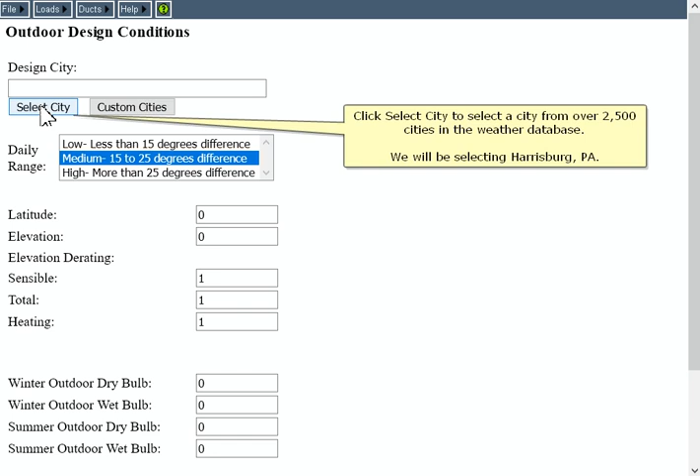Click the Select button for United States. Click Select for the state of Pennsylvania to select from all the cities available in the state. And finally, click Select for Harrisburg. Notice that the latitude, elevation, and other inputs have been filled in from the data for Harrisburg.

Next, we'll go to the default room data page. Click the Loads menu, then click Default Room Data. On the default room data page, you only need to fill in some of the dimension inputs, while others you can ignore. For example, you should enter the default room height, wall height, window width and height, and door width and height. You can ignore all the other dimension inputs on this page.

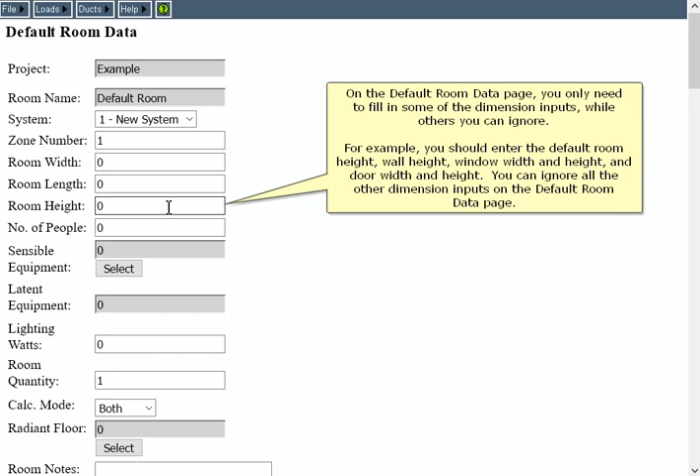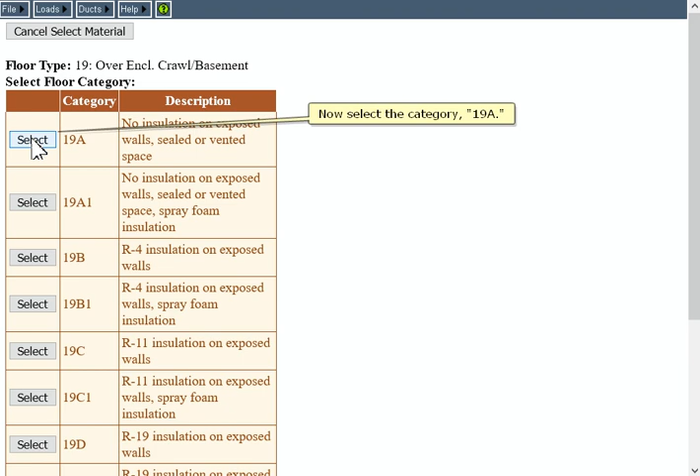Now let's select some default materials for this page. Click the Material button for the default floor. Click the Select button for floor type 19, over enclosed crawl space / basement. Now select the category 19A. Finally, select floor material 19A-19P.

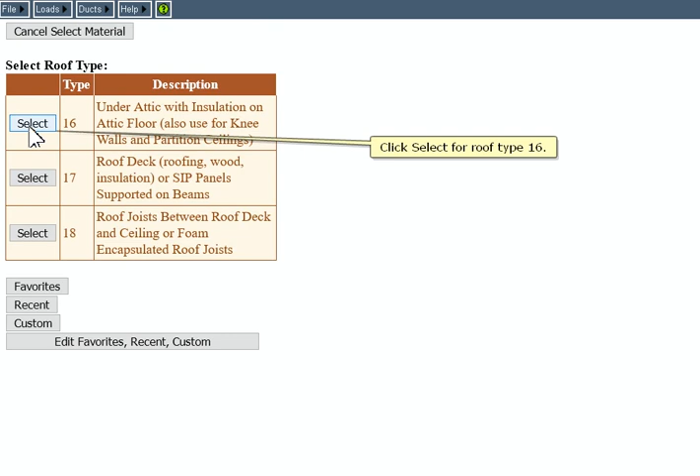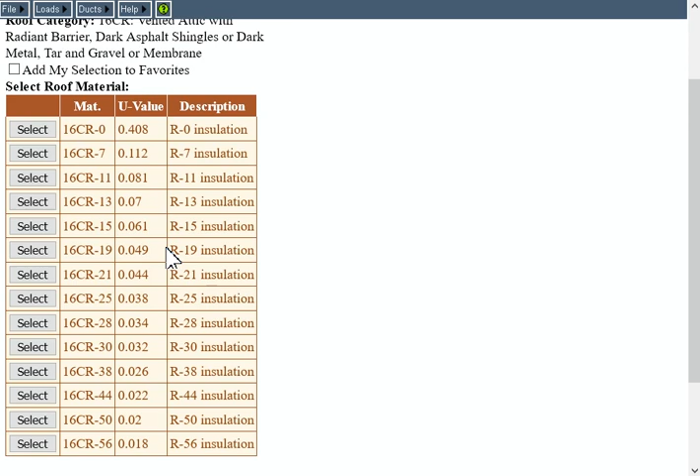We'll now continue with selecting defaults for the other kinds of materials. Click the Material button for the default roof. Click Select for roof type 16. Click Select for roof category 16CR. And finally, click the Select button for roof material 16CR-19.

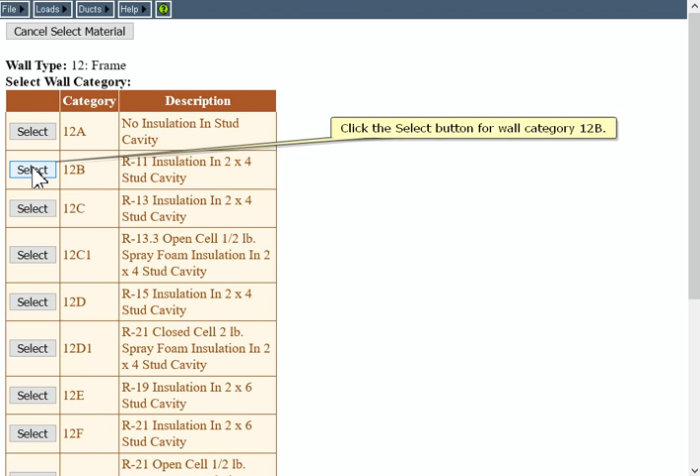Click the Material button under Walls so we can select a default wall material. Click Select for wall type 12, Frame. Click the Select button for wall category 12B. And finally, click the Select button for wall material 12B-4SW.

The wall height is one of the few dimension inputs on default room data that you should fill in. Click in the Wall Height box and enter 8 feet.

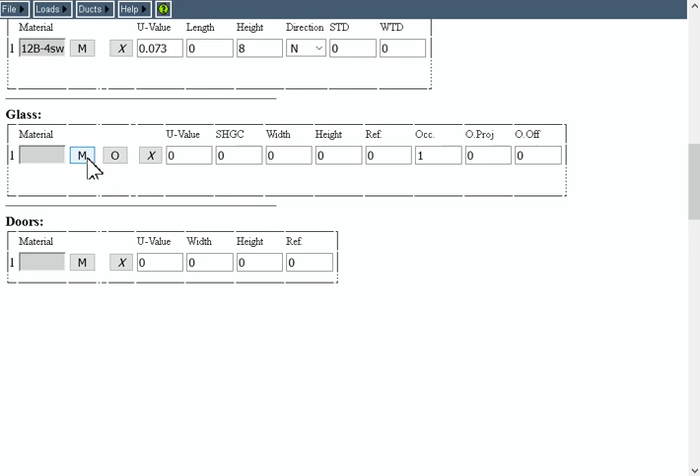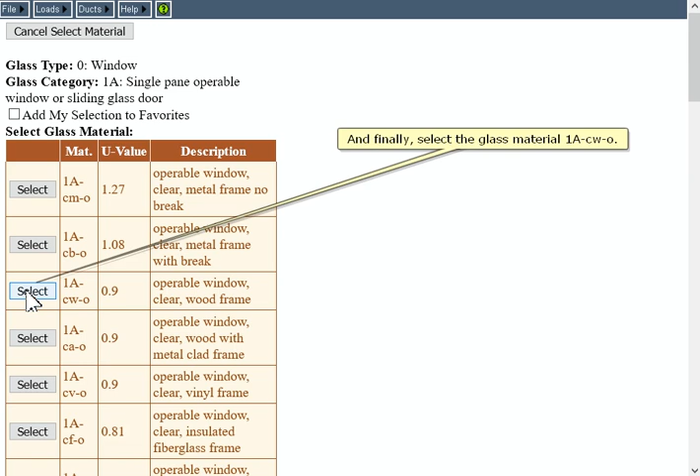Click the Material button to select a default glass material. Click the Select button for Window. Select the 1A category. And finally, select the glass material 1A-CW-O. For the default glass, enter a default width and height.

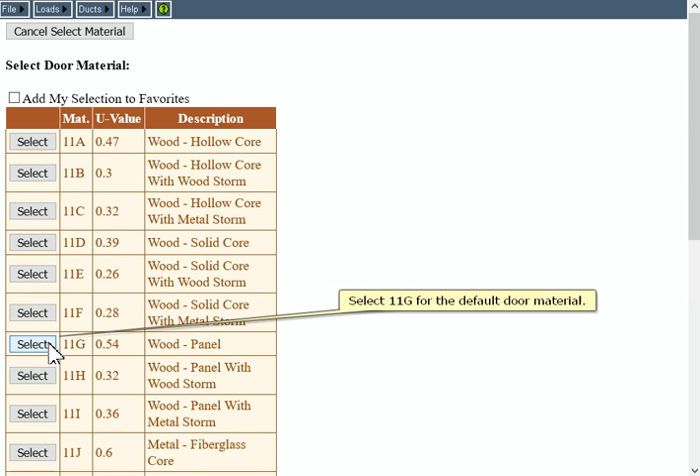Now click the Material button for doors to select a default door material. Select 11G for the default door material. Enter width and height for the default door.

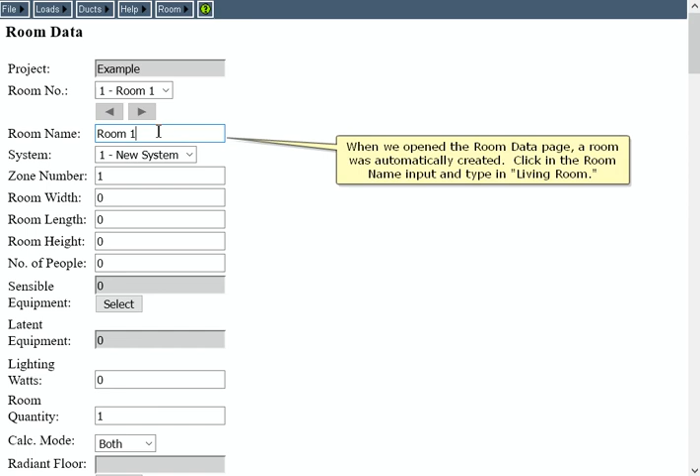Now let's enter the actual room data. Click the Loads menu, then click Room Data. When we opened the room data page, a room was automatically created. Click in the room name input and type in Living Room.

Now let's enter dimensions for the room. Now let's enter 2 people for this room, and let's enter 300 BTUH of sensible equipment gain. Click the Select button.

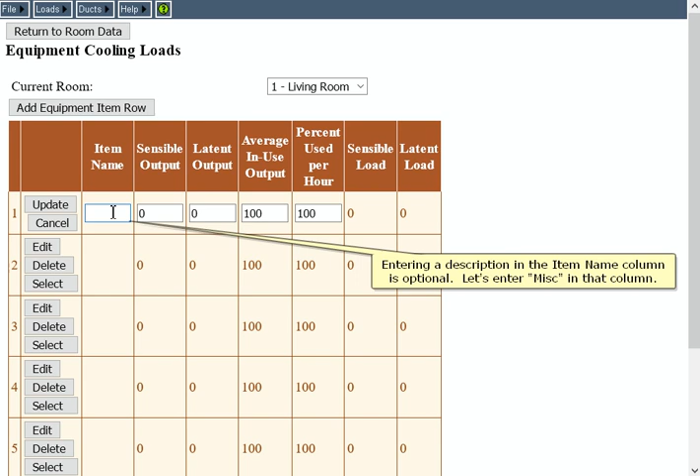There are 6 blank equipment item rows available for you to enter data. Click the Edit button for row 1. Entering a description in the item name column is optional. Let's enter MISC in that column, and now enter 300 BTUH of sensible gain for this item. To save our changes for row 1, click the Update button. That will take the row out of edit mode.

Now let's return to the room data page. The living room in this house has two different floors, a slab and a floor over an open crawl space.

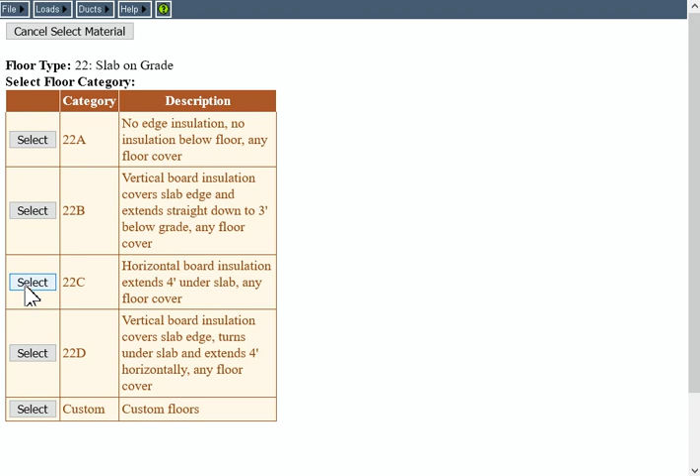Click the Material button to select the material for the slab part of the floor. Click to select 22, Slab on Grade. Select 22C for the category. And finally, select material 22C-10pl for the slab floor.

Now enter the dimensions of the floor. We can enter all dimensions, but the perimeter is the only one that matters for a slab floor.

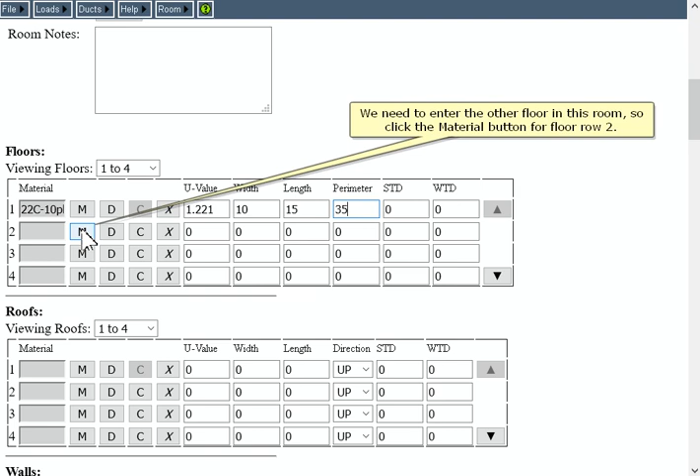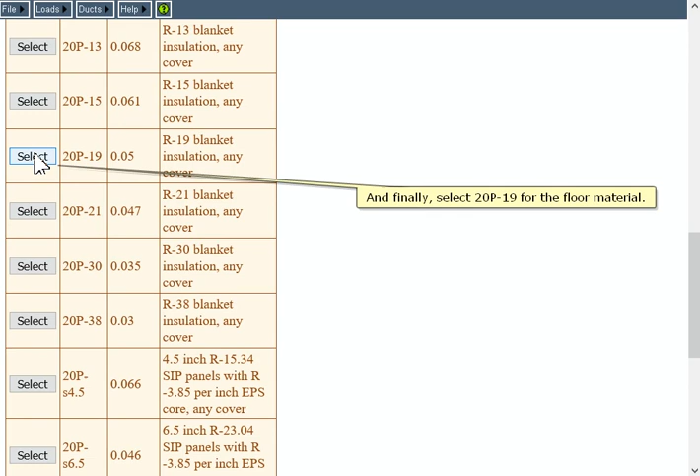We need to enter the other floor in this room, so click the Material button for floor row 2. Select Type 20, and select Category 20P. And finally, select 20P-19 for the floor material.

Enter the dimensions for floor 2. Since it's not a slab floor, the perimeter isn't necessary.

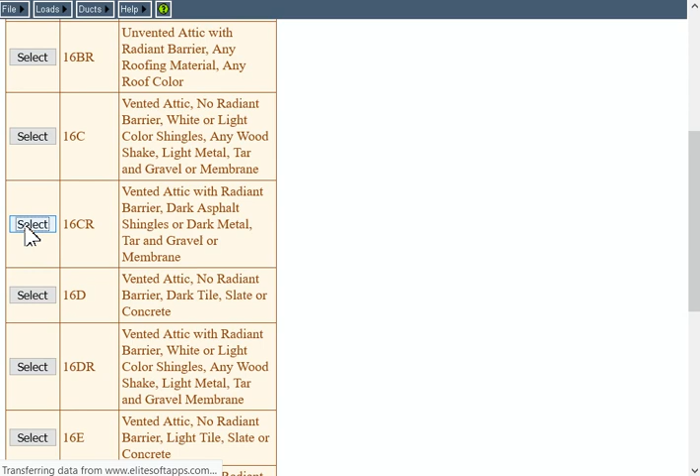Click the Material button for roof 1. Select Type 16. Select the category 16CR. And finally, select 16CR-19 for the roof material. Enter the roof dimensions.

This roof contains a skylight, so we need to be sure and enter the direction since it affects the load on the glass. Click the direction input. Click E to change the direction to east.

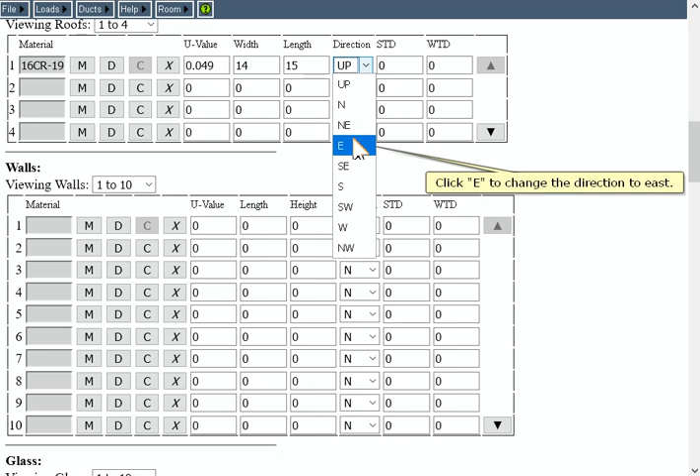We have 3 walls to enter for this room. Click the M button for the first wall.

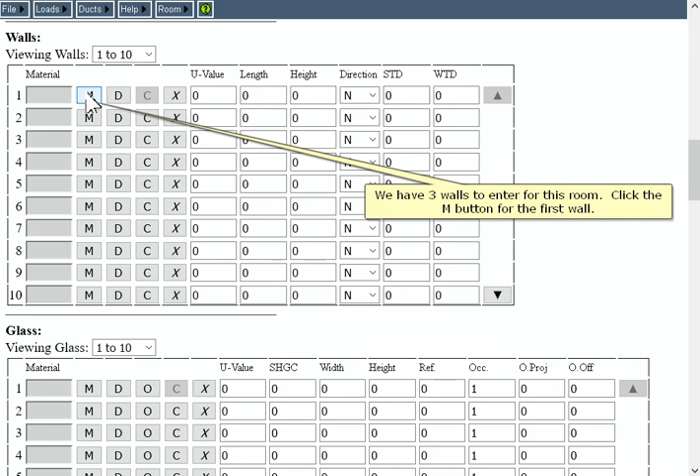Select wall type 12. Select the category 12B. And finally, select wall material 12B-4SW.

Now enter this wall's length and height. Wall 2 is the same material as wall 1, so to save time, we can click the Copy Above Wall button.

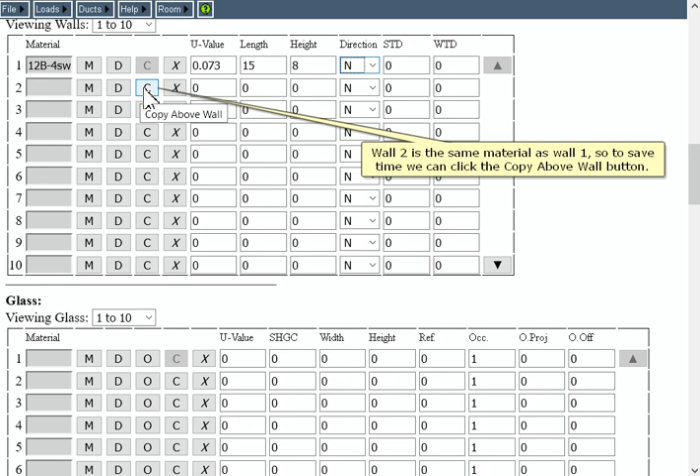Wall 2 faces east, so click the direction input. Now click E to set the direction to east.

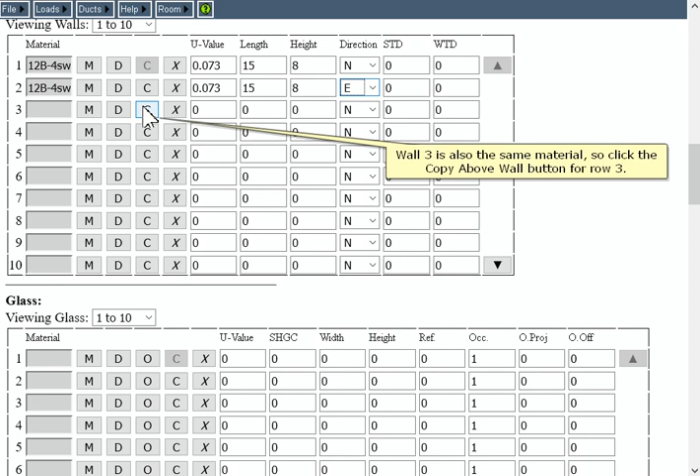Wall 3 is also the same material, so click the Copy Above Wall button for row 3. Now change the dimensions and direction.

There are 4 glass items in the living room. Click the Material button to select the first glass material. This glass is a window, so select Window.

Select 1G for the glass category. Select 1G-CM-S for the glass material.

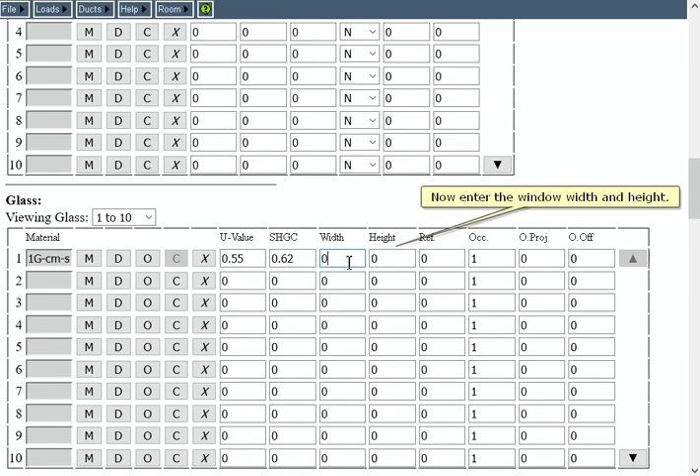Now enter the window width and height. This window is in wall number 1 in this room, so enter 1 for the reference input.

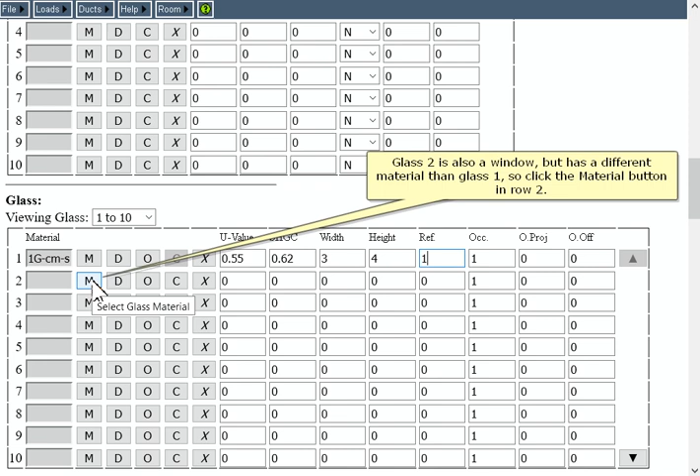Glass 2 is also a window, but has a different material than glass 1, so click the Material button in row 2. This glass is also a window.

The category is 1C. And finally, select the material 1C-CB.

Enter the window's dimensions. This window is in east-facing wall number 2 in this room, so enter 2 for the reference.

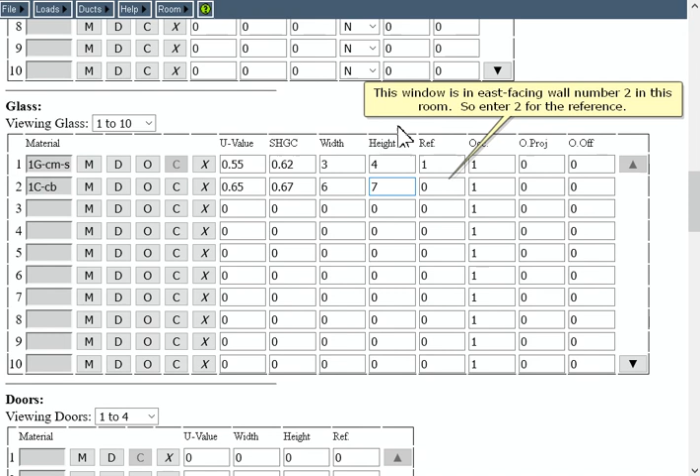Glass 3 happens to be the same as the default glass in this project, so click the Insert Default Glass button in row 3.

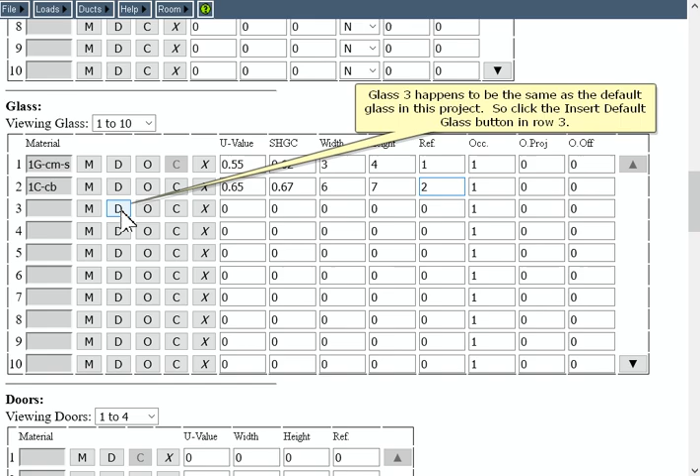The width of glass 3 is different from the default, so change the width. This window is in south-facing wall 3 in this room, so change the reference input to 3.

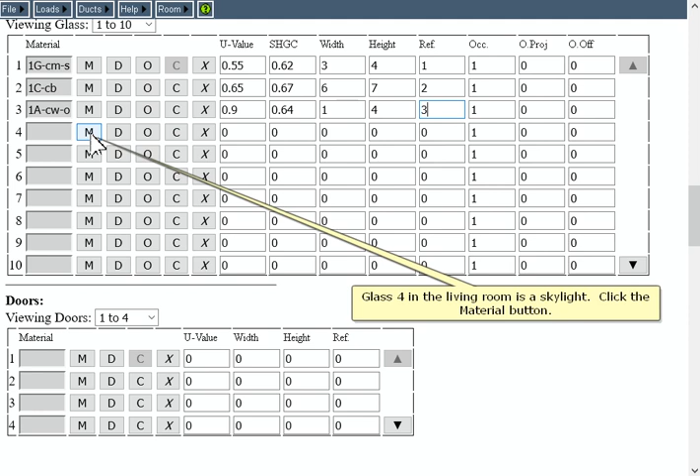Glass 4 in the living room is a skylight. Click the Material button. Select Skylight for the type.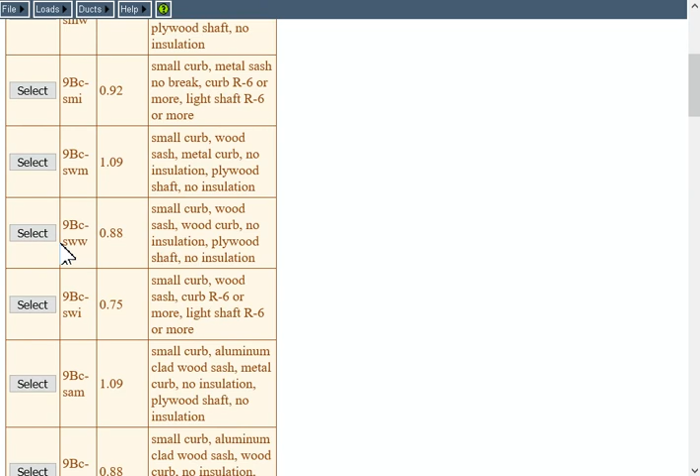The category for this skylight is 9BC. And finally, select 9BC-SWW for the skylight material.

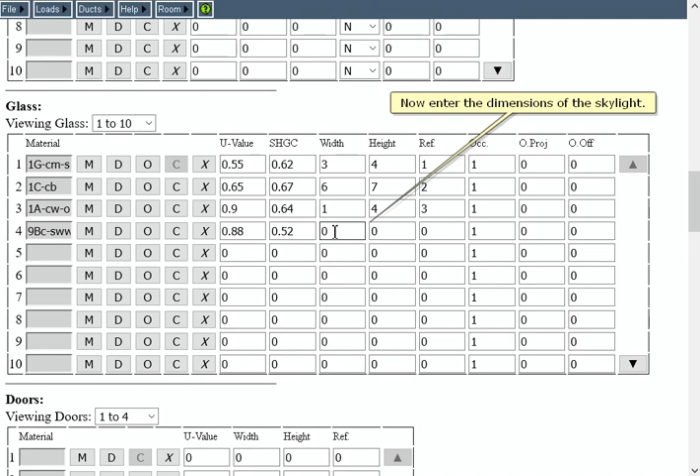Now enter the dimensions of the skylight. The skylight is in roof number 1 in this room, so enter 1 for the reference input.

The first 2 windows in this room have overhangs, so enter the overhang dimensions for windows 1 and 2.

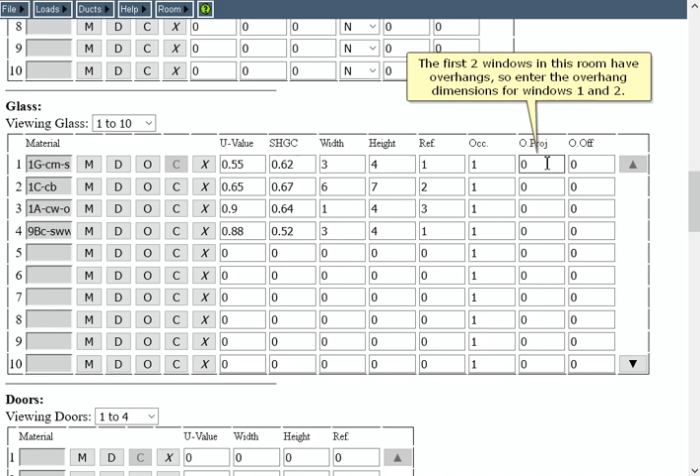This room has a door, so click the Material button for door 1. Select 11F for the door material.

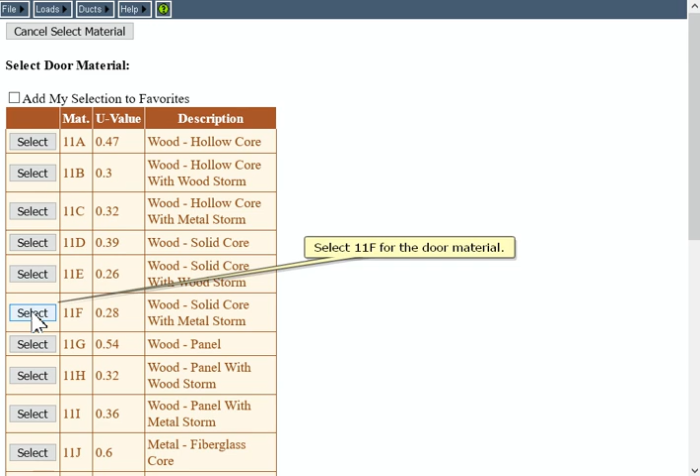The door is 3 feet wide by 7 feet high. The door is in south-facing wall 3 in this room, so enter 3 for the reference input.

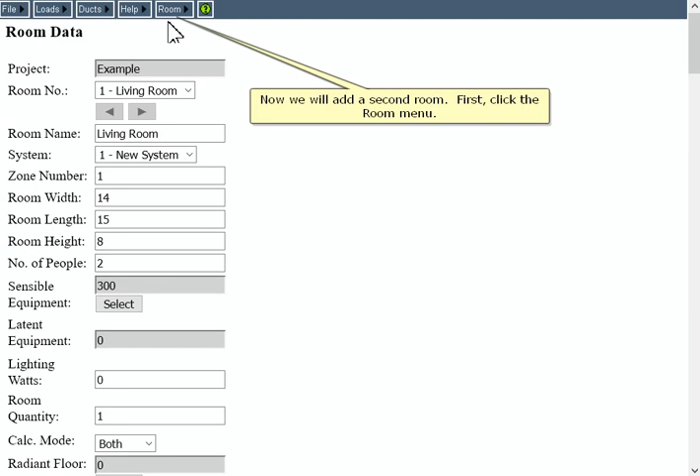Now we'll add a second room. First, click the Room menu and click Add Room. This room is the kitchen.

Enter the dimensions of the room. Enter 1 person for this room. This kitchen has 1200 BTUH of sensible equipment and 300 BTUH of latent equipment.

Click Select to enter these values. Click Edit to edit equipment row 1.

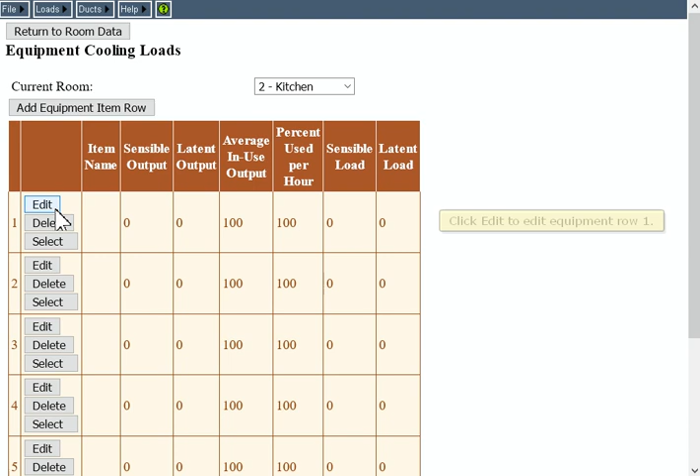Again, we'll enter MISC for the optional item name input. Now we'll enter 1200 sensible and 300 latent. To save the changes we just made, click the Update button.

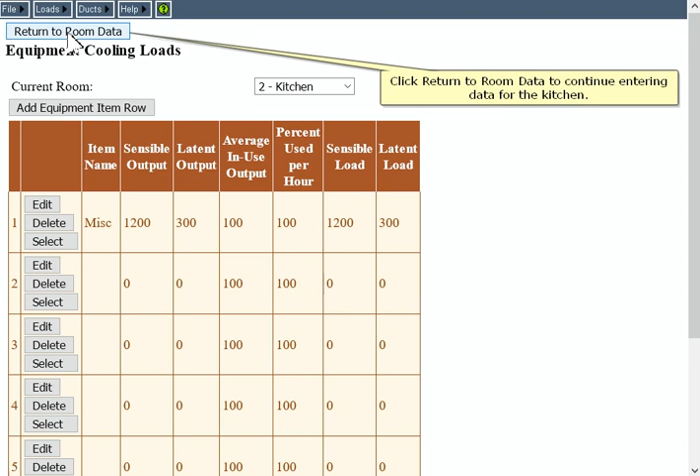Click Return to Room Data to continue entering data for the kitchen.

The kitchen has 1 floor material, so click the Material button. Select 20 for the floor type.

Select 20P for the floor category. And finally, select 20P-13 for the floor material.

Enter the floor dimensions. Remember that perimeter is not needed unless the floor is a slab.

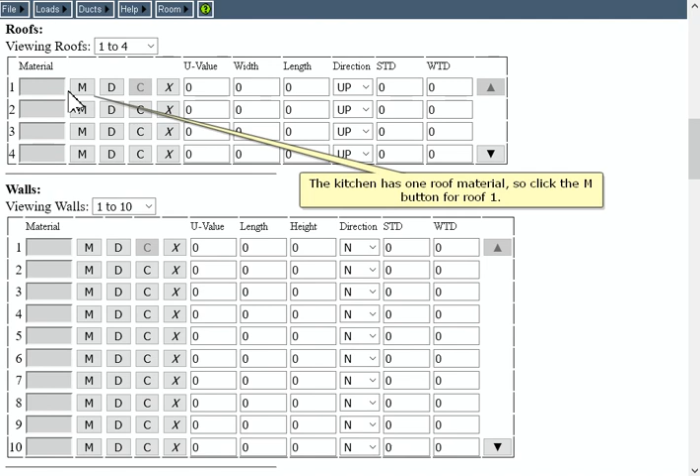The kitchen has 1 roof material, so click the M button for roof 1. Select 16 for the roof type.

Select 16CR for the roof category. And finally, select 16CR-19 for the roof material.

Now enter the roof dimensions.

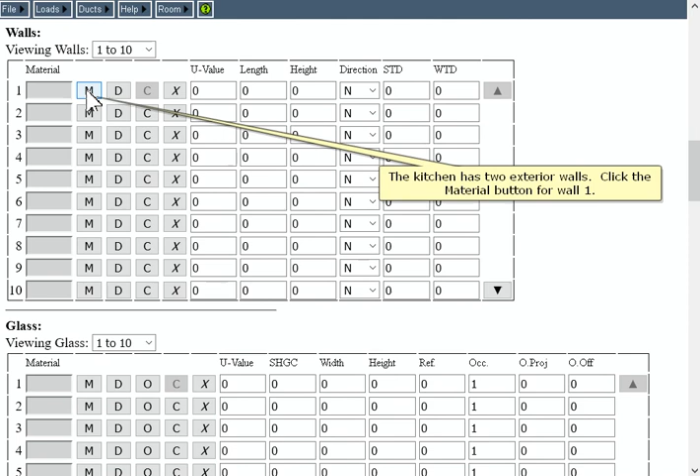The kitchen has 2 exterior walls. Click the Material button for wall 1. The wall type is 12.

The category is 12B. And finally, select 12B-OSW for the wall material.

Now enter the length and height of the wall. Wall 2 in the kitchen is of the same material as wall 1, so click the Copy Above Wall button for row 2.

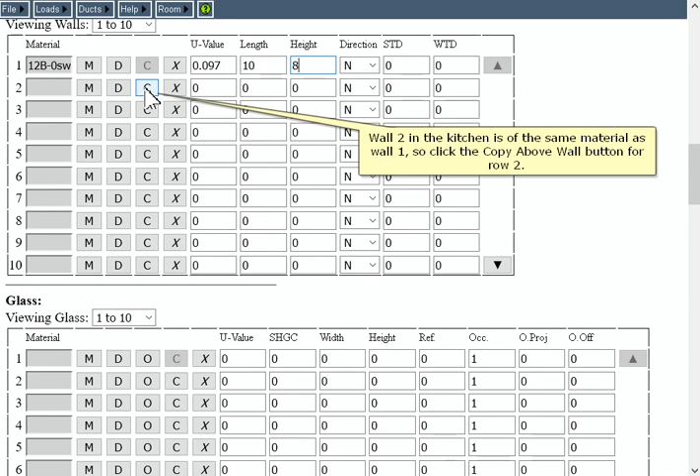The length of wall 2 is different from that of wall 1. And wall 2 faces west. Click W to make this wall face west.

The kitchen has 1 window and it's in the north-facing wall. Click the Select Glass Material button for glass 1.

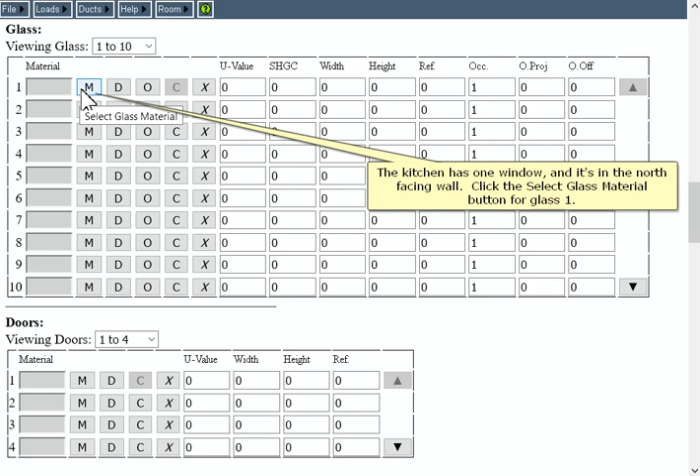Select the type as window. Select 1G for the window category.

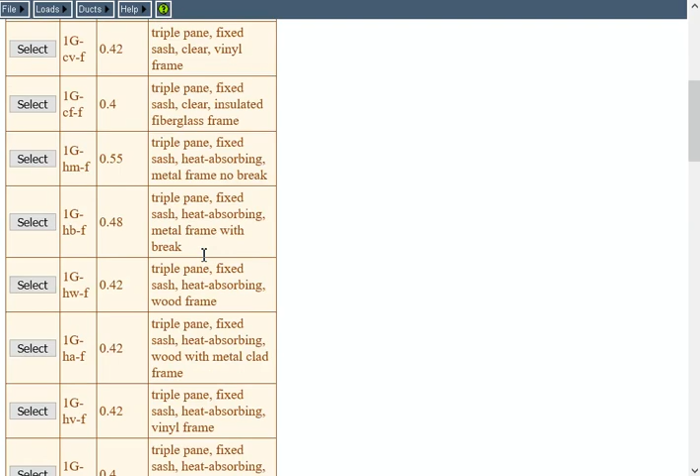Select 1G-CM-S for the window material. Enter the width and height for this window. This window is in wall 1 in this room, so enter 1 for the reference input. This window has an overhang that projects out 3 feet from the wall and is 1 foot above the window.

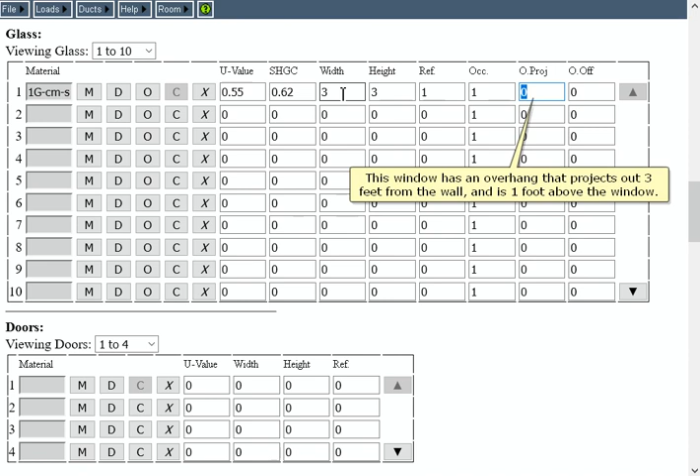Now create room 3. Click the Room menu, then click Add Room. The third room is the bedroom. Enter the dimensions of the room, and enter 2 people for this room.

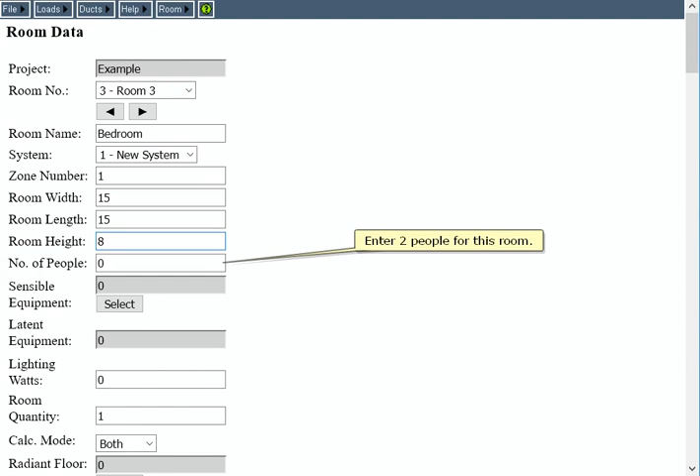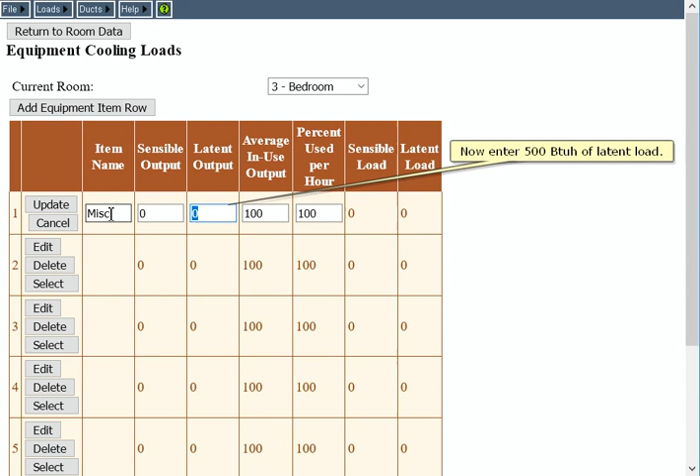Now we need to enter 500 BTUH of latent equipment for the bedroom. Click Select, then click Edit to put Equipment Row 1 into editing mode. Remember that the item name is optional. Enter MISC for the item name, then enter 500 BTUH of latent load. Click the Update button to save your changes for Row 1, then click Return to Room Data to continue entering data for the bedroom.

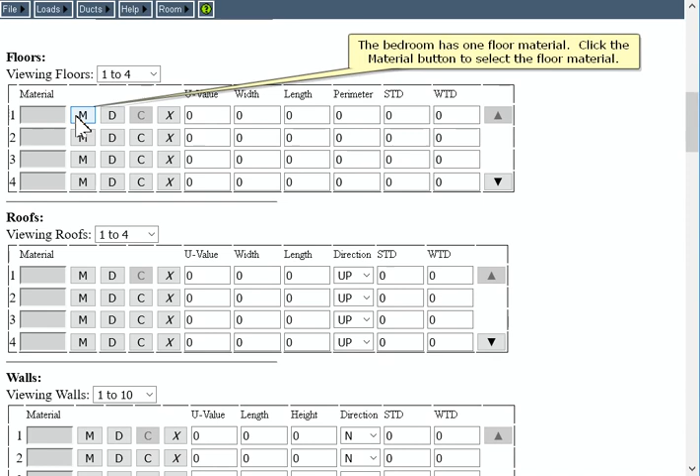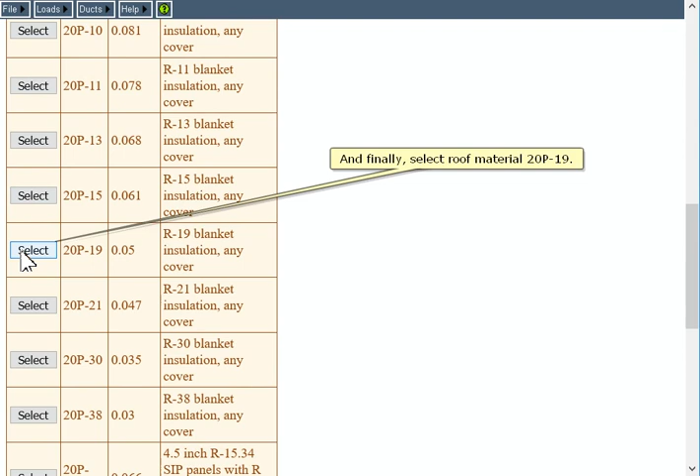The bedroom has one floor material. Click the Material button to select the floor material. Select Type 20, then select 20P for the floor category. Finally, select Roof Material 20P-19. Once again, enter the width and length of the floor.

The bedroom has two roof materials. Click the M button to select the material for Roof 1. Select Roof Type 16, select Category 16CR, and finally select Roof Material 16CR-19. Enter this roof's dimensions.

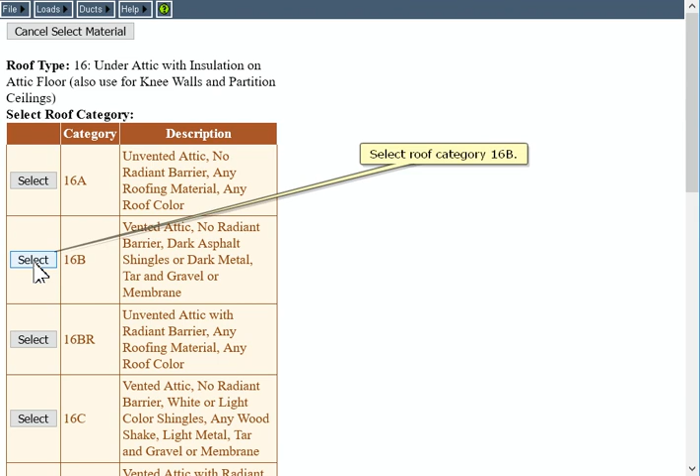Click the Material button for Roof 2. Select Roof Type 16 again, select Roof Category 16B, and finally select Roof Material 16B-21. Now enter the dimensions of Roof 2.

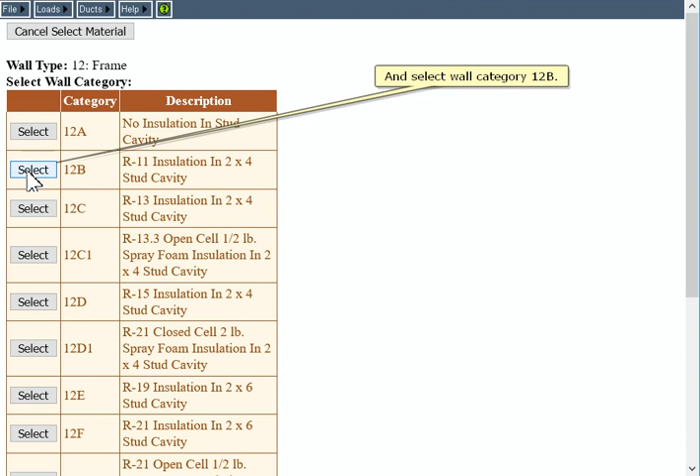The bedroom has 3 exterior walls. Click the Material button to select the material for Wall 1. Select Wall Type 12, select Wall Category 12B, and finally select Wall Material 12B-OSW. Enter the wall dimensions. Click the Direction box to set the direction the wall faces, then click W to set the direction to west.

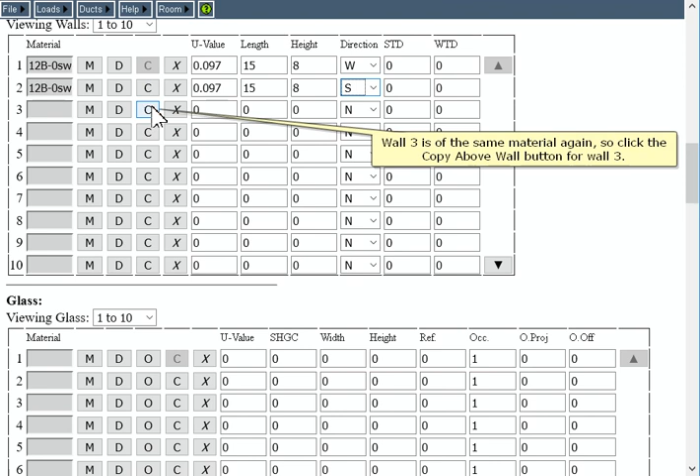Wall 2 is the same material as Wall 1, so click the Copy Above Wall button for Wall 2. Click to change the direction, and set the direction to south. Wall 3 is of the same material again, so click the Copy Above Wall button for Wall 3. Change the length of Wall 3, click to change the direction for Wall 3, and set the direction of Wall 3 to east.

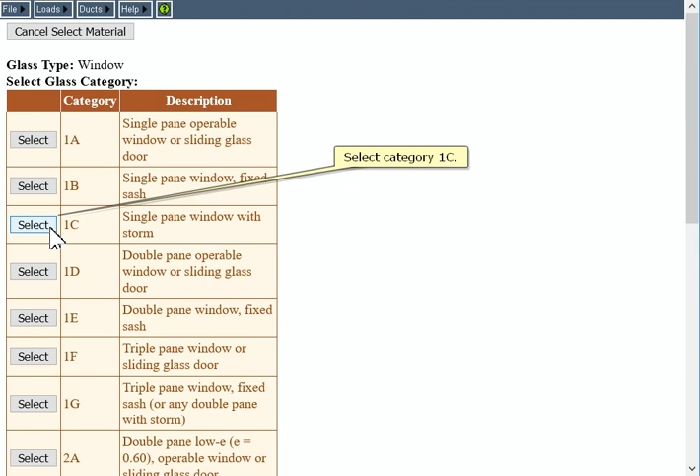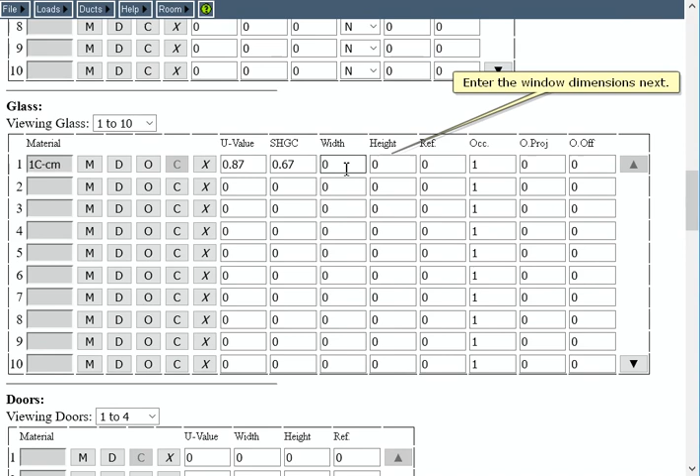The bedroom has 2 windows. Click the Select Glass Material button for Glass 1. Select Window for the glass type, select Category 1C, and finally select Glass Material 1C-CM. Enter the window dimensions next. This window is in Wall 1 in this room, so enter 1 for the reference input. Enter the overhang offset and projection.

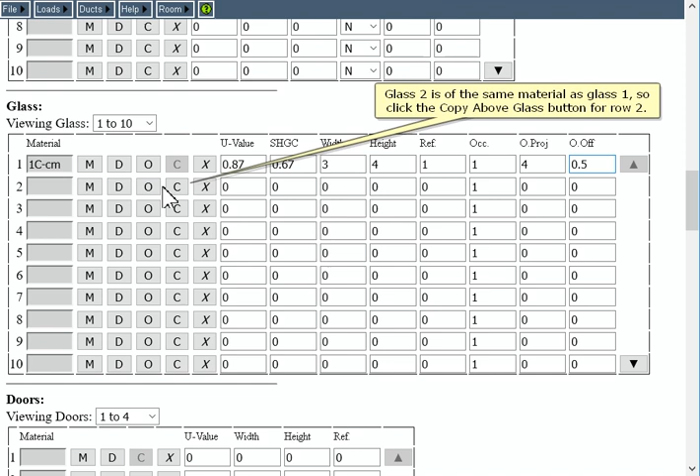Glass 2 is of the same material as Glass 1, so click the Copy Above Glass button for Row 2. This window is in south-facing Wall 2, so change the reference input to 2.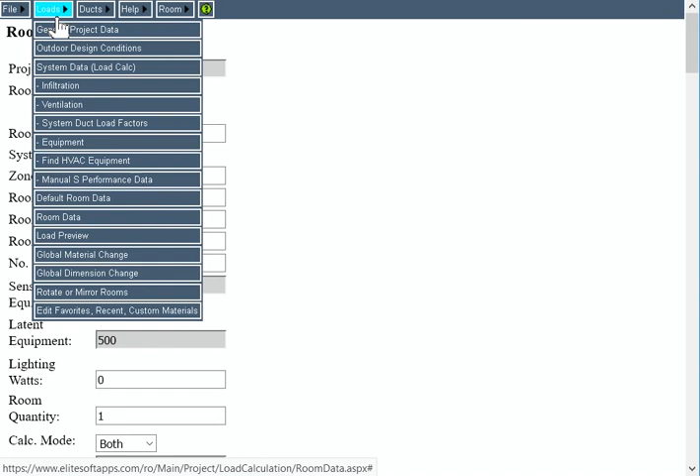Now let's enter some of the system data. Click the Loads menu, then click System Data. Enter a name for the system. The default indoor temperatures, relative humidities, and coil delta T values are all fine for this example, so leave them unchanged.

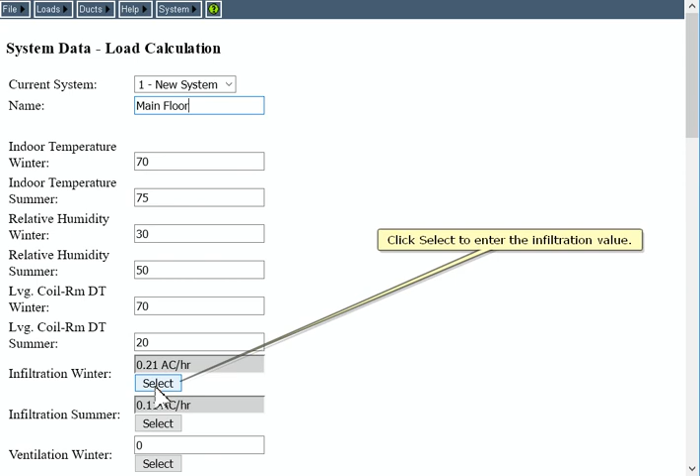Click Select to enter the infiltration value. The Manual J option is selected by default, so let's leave it that way. The only option we need to change in this example is construction tightness. Select Semi-Loose for the tightness.

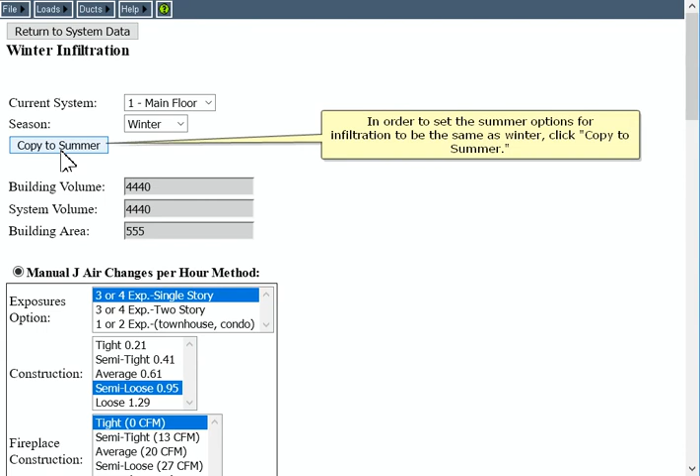In order to set the summer options for infiltration to be the same as winter, click Copy to Summer. Click the Season option to confirm that the summer options are the same. We can see that the construction tightness for summer is also set to semi-loose. Click Return to System Data.

We can set the duct load factors now, too. Click the Set button. Each system can use up to 5 duct load factor scenarios. In this example, we are only using scenario 1. Let's name it Main.

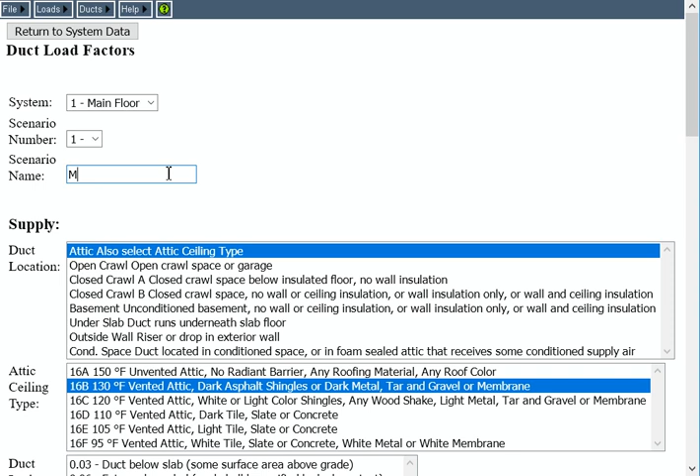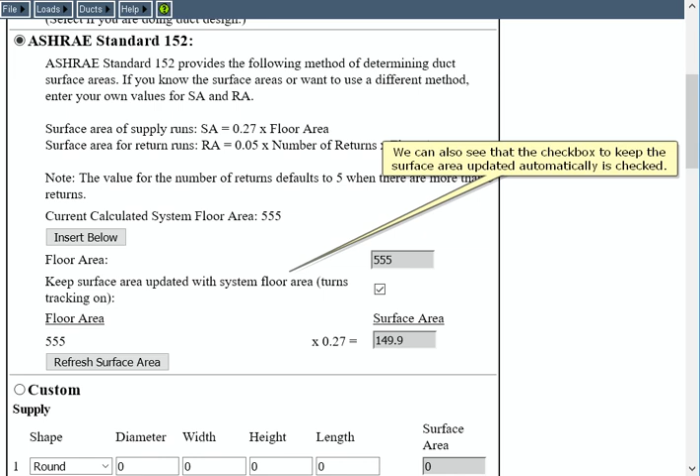To set the duct surface area for the supply side, click the Calculate button. Here we can see that the surface area is being determined by the ASHRAE Standard 152 method, the simplest. We can also see that the checkbox to keep the surface area updated automatically is checked. Click OK to return to the duct load factors page, then click to return to the system data page.

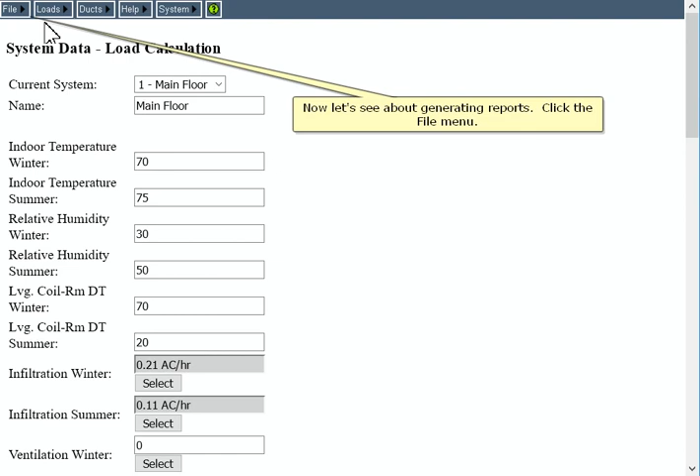Now let's see about generating reports. Click the File menu, then click Select Reports. In the Evaluation of Project box, we can see that there is a warning that glass number 4 in room number 1 has a problem.

Click the Loads menu, then click Room Data. The problem is in room 1, so click the room number box, then click Living Room.

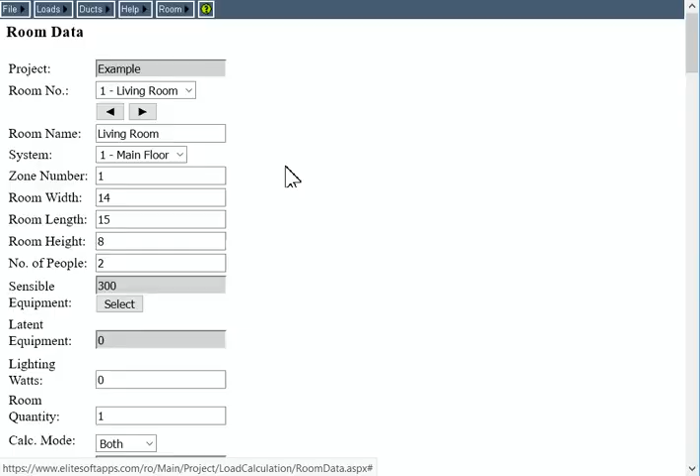Now click the Glass Options button for the problem glass. Since the roof that the skylight is in faces east and not up, the skylight tilt has to be at an angle greater than 0. Select 30 degrees. Click Return to Room Data.

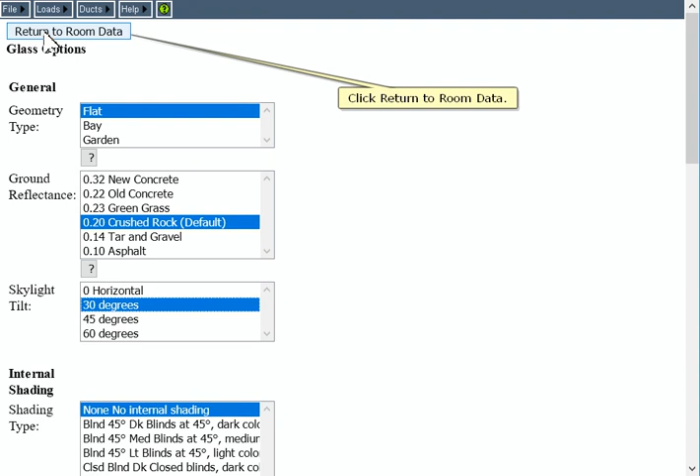Now let's return to the Select Reports page and see whether there are any more warnings or errors. Click the File menu, then click Select Reports. We can see that the Evaluation of Project box now shows no errors or warnings.

Click Create Reports PDF. Click OK to open the PDF file showing the reports. Click Next Page.